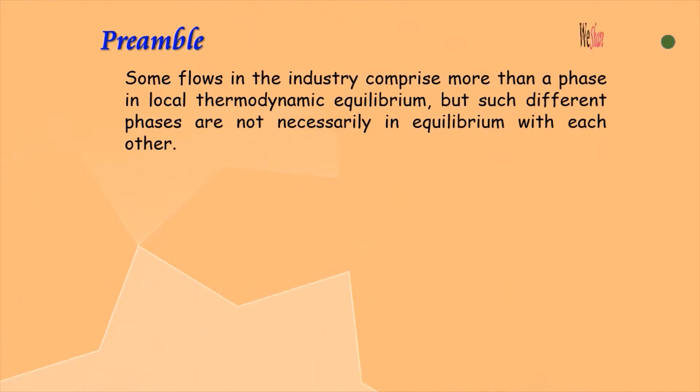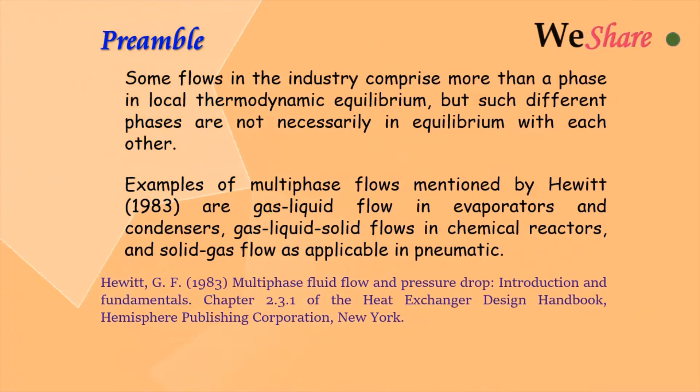Before we present the theoretical review, let us consider a preliminary introduction. Some flows in the industry comprise more than a phase in local thermodynamic equilibrium, but such different phases are not necessarily in equilibrium with each other. Examples of multi-phase flows mentioned by a scholar are gas-liquid flow in evaporators and condensers, gas-liquid-solid flows in chemical reactors, and solid-gas flow as applicable in pneumatics.

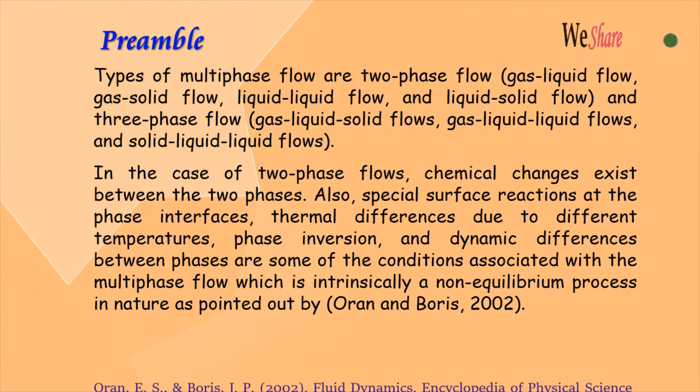Types of multi-phase flow are two-phase flow (gas-liquid flow, gas-solid flow, liquid-liquid flow, and liquid-solid flow) and three-phase flow (gas-liquid-solid flows, gas-liquid-liquid flows, and solid-liquid-liquid flows). In the case of two-phase flows, chemical changes exist between the two phases. Also, special surface reactions at the phase interfaces, thermal differences due to different temperatures, phase inversion, and dynamic differences between phases are some of the conditions associated with the multi-phase flow, which is intrinsically a non-equilibrium process in nature, as pointed out by Oran and Boris, 2002.

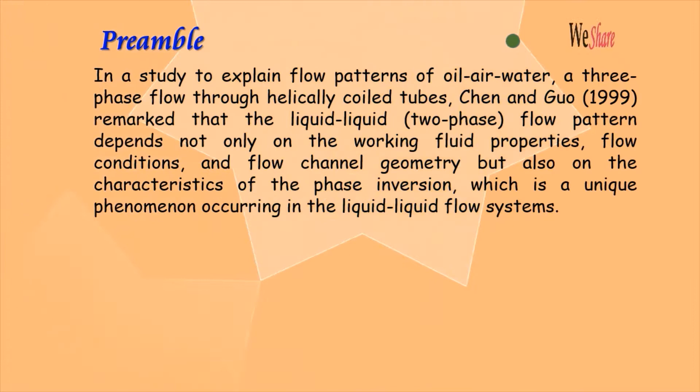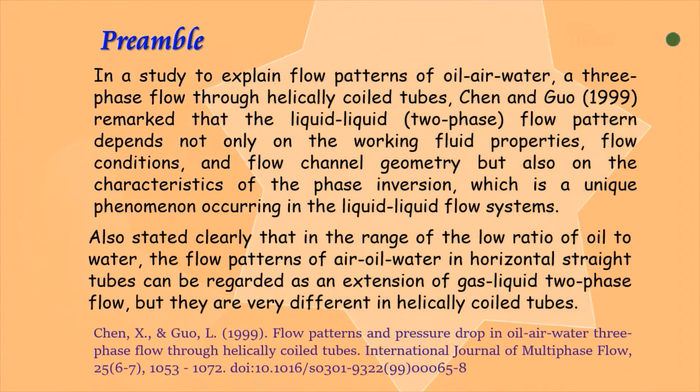In a study to explain flow patterns of oil-air-water, a three-phase flow through helically coiled tubes, some scholars remarked that the liquid-liquid two-phase flow pattern depends not only on the working fluid properties, flow conditions, and flow channel geometry, but also on the characteristics of the phase inversion, which is a unique phenomenon occurring in liquid-liquid flow systems. They also stated clearly that in the range of the low ratio of oil to water, the flow patterns of air-oil-water in horizontal straight tubes can be regarded as an extension of gas-liquid two-phase flow, but they are very different in helically coiled tubes. Two-phase flow is encountered in the petroleum and nuclear industries.

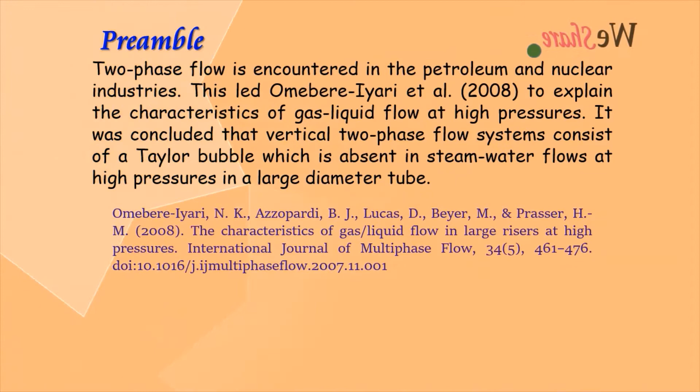This led some scholars to explain the characteristics of gas-liquid flow at high pressures. It was concluded that vertical two-phase flow systems consist of a Taylor bubble, which is absent in steam-water flows at high pressures in a large diameter tube. There are many kinds of non-Newtonian fluids. Some scholars describe the second-grade fluid as a subclass of non-Newtonian fluid in which the velocity field has up to two derivatives in a stress-strain tensor relationship, whereas in the Newtonian fluid it has derivatives up to first order. The Navier-Stokes equation is most suitable to describe the dynamics of Newtonian fluids like water, because all the fluids in this category have a linear relationship between the shear stress and the shear strain.

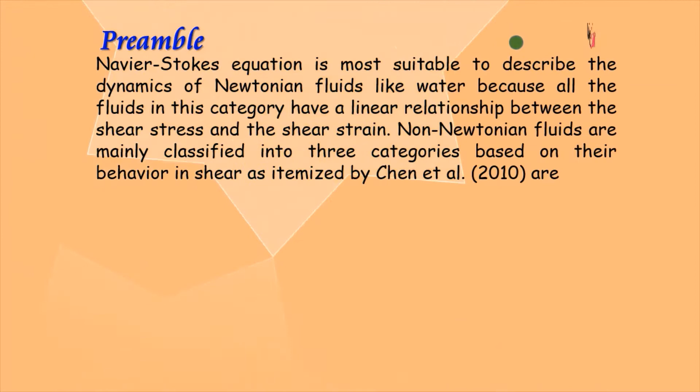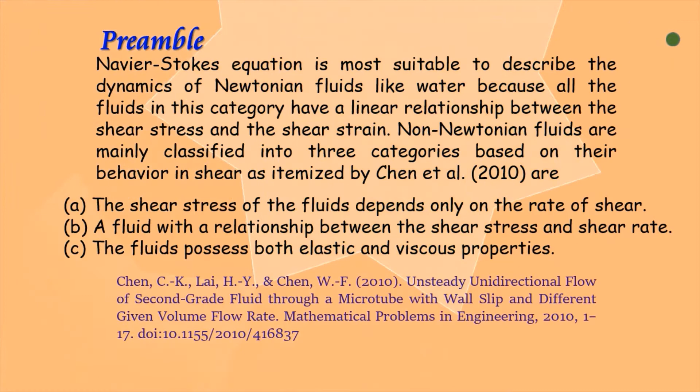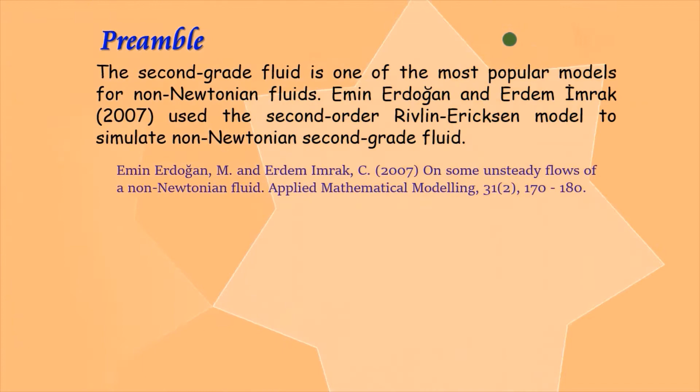Non-Newtonian fluids are mainly classified into three categories based on their behavior in shear, as itemized by some scholars in the year 2010: 1. The shear stress of the fluids depends only on the rate of shear. 2. A fluid with a relationship between the shear stress and shear rate. 3. The fluids possess both elastic and viscous properties. The second-grade fluid is one of the most popular models for non-Newtonian fluids. Some scholars used the second-order Rivlin-Ericksen model to simulate non-Newtonian second-grade fluid. Next, we shall now present the theoretical review.

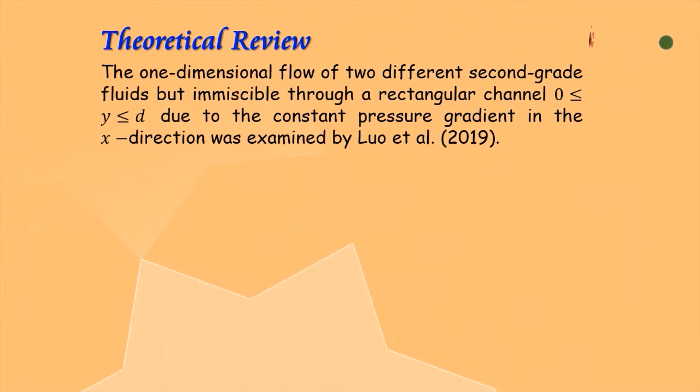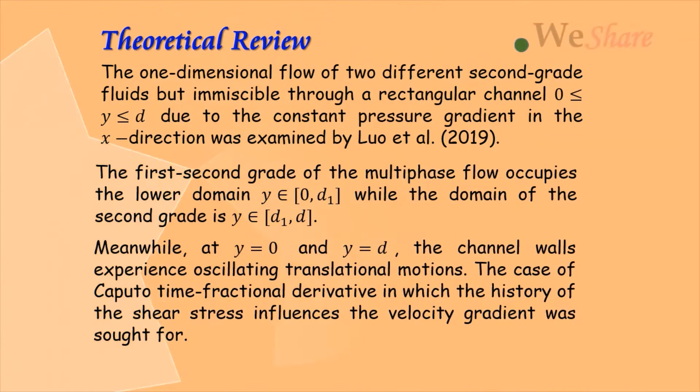The one-dimensional flow of two different but immiscible second-grade fluids through a rectangular channel due to the constant pressure gradient in the x direction was examined by the scholars. The first second-grade fluid of the multi-phase flow occupies the lower domain, while the domain of the second is at the top. Meanwhile, at y equals 0 and y equals d, the channel walls experience oscillating translational motions. The case of the Caputo time fractional derivative, in which the history of the shear stress influences the velocity gradient, was sought for. Next is to present the empirical review.

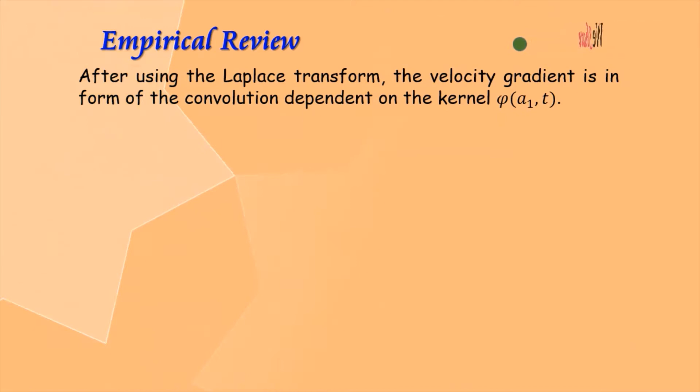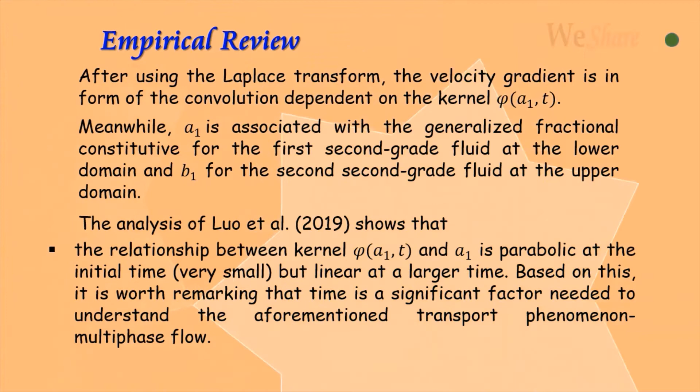After using the Laplace transform, the velocity gradient is in the form of a convolution dependent on a kernel. Meanwhile, parameter A1 is associated with the generalized fractional constitutive for the first second-grade fluid at the lower domain, and B1 for the second-grade fluid at the upper domain. The analysis of the study shows that the relationship between the kernel and A1 is parabolic at the initial time, very small, but linear at a larger time. Based on this, it is worth remarking that time is a significant factor needed to understand the aforementioned transport phenomenon, multiphase flow. When t equals 0.05, increasing A1 and B1 causes the velocity and shear stress to rise, although the shear stress is smaller in the lower domain but higher in the upper domain.

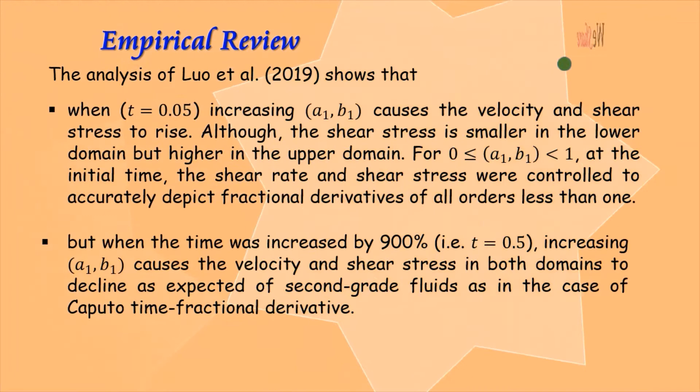For A1 and B1 within the range of 0 and 1, at the initial time, the shear rate and shear stress were controlled to accurately depict fractional derivatives of all orders less than 1. But when the time was increased by 900%, increasing A1 and B1 caused the velocity and shear stress in both domains to decline, as expected of second-grade fluids, as in the case of the Caputo time fractional derivative.